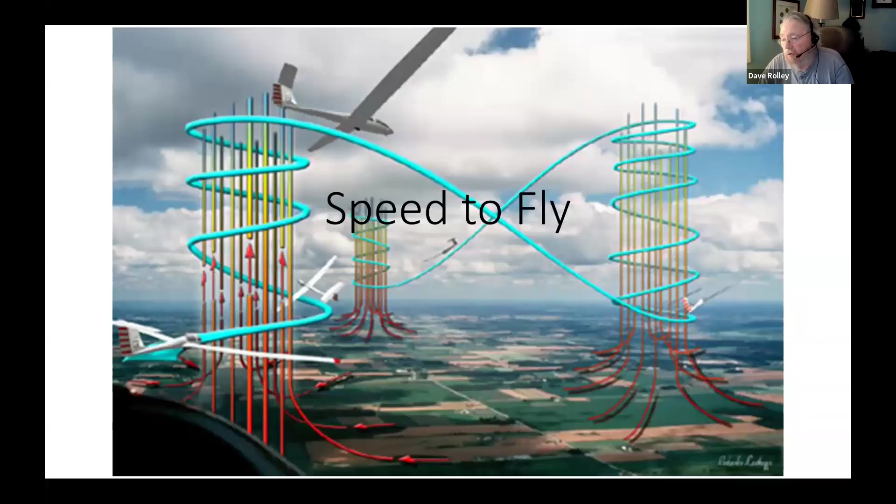In this year's first session, the Intro to Cross Country, we discussed a training approach that utilized the proving grounds that was developed by the members of the Cu Nim Gliding Club up in Calgary, Alberta. The Black Forest implementation has a simple four-leg task with the turn points at a 5 nautical mile radius out from the airport as the racetrack task in the proving grounds.

And it's roughly 50 kilometers around the task, plus the distance to and from the start and finish point, making for a total of about 70 kilometers. This is the first cross-country flying that most of our members are exposed to. And the gliders that we've used for this over the years: a K-21, a PW-5, a Russia, and our Blanik. All of these are roughly 30 to 1.

So, just for oversimplification, we considered the other three types, not the Blanik, as 32 to 1 gliders. And we set up the rules for the racetrack using the bronze badge guidance at 16 to 1 glide ratios, and we gave them hard decks. And the whole idea behind a lot of this was to take away some of the more difficult decision making from early cross country.

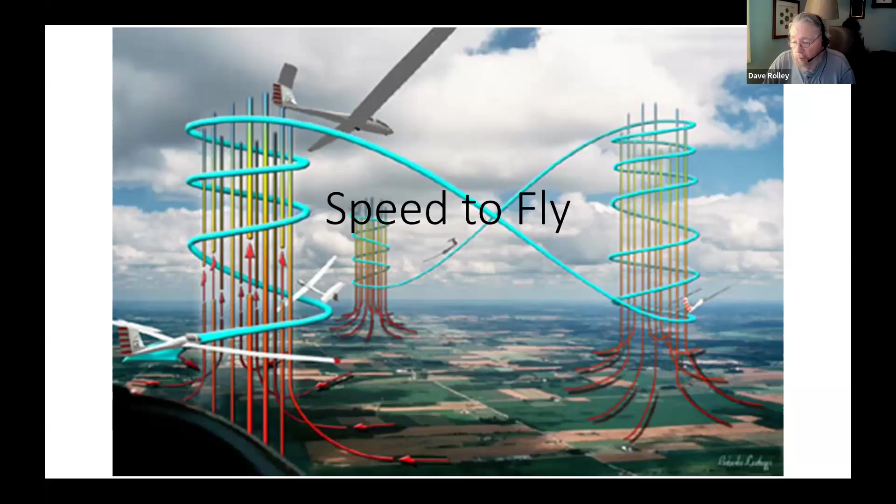So most of what we're going to discuss this evening, I learned in my first glider years and years ago, forgot a bunch, and then I relearn it and rediscover it every few years. So we're going to talk about a philosophical discussion on the speed to fly. We're hoping to gain an understanding of it and illustrate its use. This isn't about racing or record flying. We're still addressing the needs of an early cross-country pilot with the goal of helping these pilots move to an intermediate or higher level of cross-country flying.

This requires an understanding of the glider performance and how to apply that knowledge. This is in-flight decision making. The training wheels, like I mentioned, that we had under the proving ground system that we use for our very early cross-country stuff in our club, are loosened or possibly removed altogether. So this is where speed to fly, you get an understanding of that, and you're on the way to longer cross-country flights.

This is decision making, and interestingly about speed to fly, this is definitely decision making with uncertainty because you're going to have missing or erroneous data, maybe an incorrect transformation of the data, and you're going to have incomplete information. So the whole thing is there's uncertainty involved, but if you've got a strategy and a process, you can overcome a lot of the uncertainty.

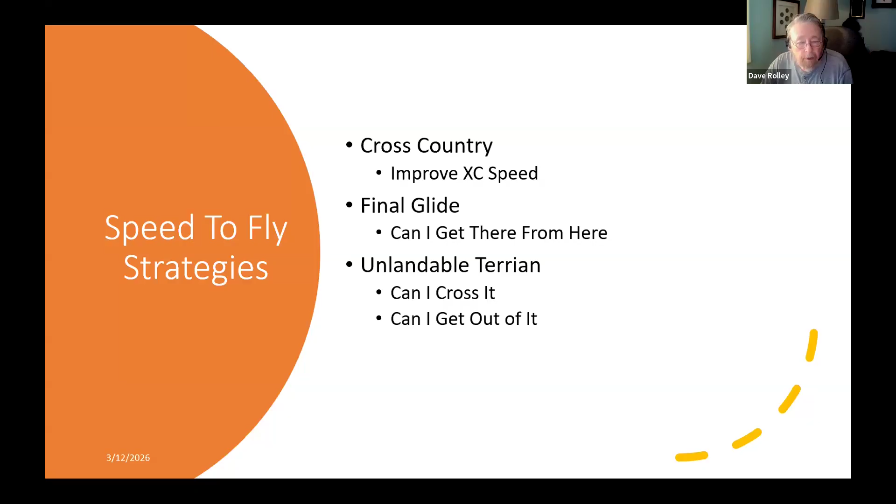I say stumbled, realizing if you're truly in dire straits or uncomfortable over unlandable terrain, how many mistakes have you made leading up to that point? So that's also something you have to think about in your growth in cross-country flying. But flying in an area where the consequences of having to land out are very, very serious, there's an adaptation to speed to fly strategy that can support the decision making under those circumstances.

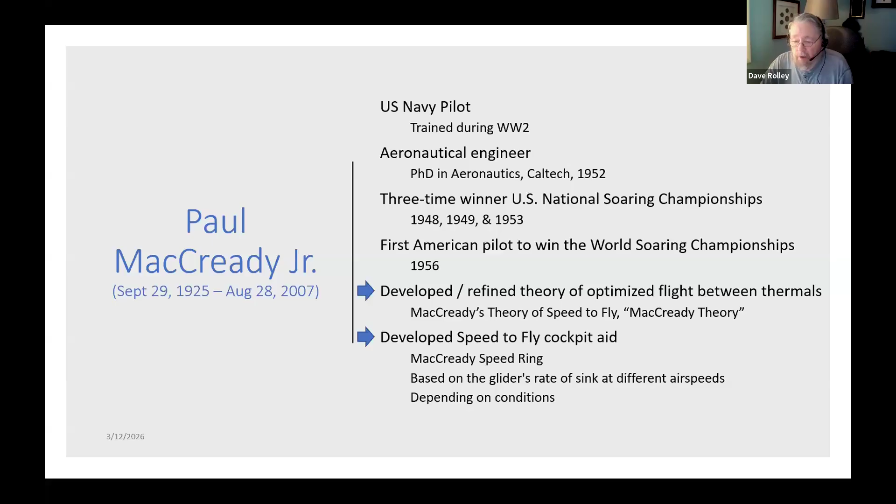And I'll show you that just so you can see, in case you ever stumble across one, you at least can recognize it. You can see where he contributed to soaring, and you can see some of his background. Now, there are an awful lot of other accomplishments in Paul MacCready's lifetime. I'm just highlighting the ones that are related to our topic this evening.

Traditionally, MacCready theory has been contest focused. And what you have to remember is that contests are an abstraction of real life. So in a contest, we're quantifying our performance and who has the best performance wins. For basic cross country, you know, did we make it home today? So you can see where there's an abstraction there.

The other one is a contest way back in the day was wafting off downwind at best glide speed or minimum sink speed, or flying a course at best glide speed. The other one is that it assumes roughly an equal distribution between climb and glide. And short-term goals are expressed as a number. We call it the MacCready number or just MacCready. And it's the expected lift in the next thermal.

How do you know? You don't. It's very much like lift bands that we've discussed previously. It's a guess based on what you see for the day and what you see along the course line. So it's also going to evolve during the day. You might start with a basic guess when you first get off in your first thermal, and then as the day progresses, you build up a more and more accurate model of how the day is going to behave in your mind.

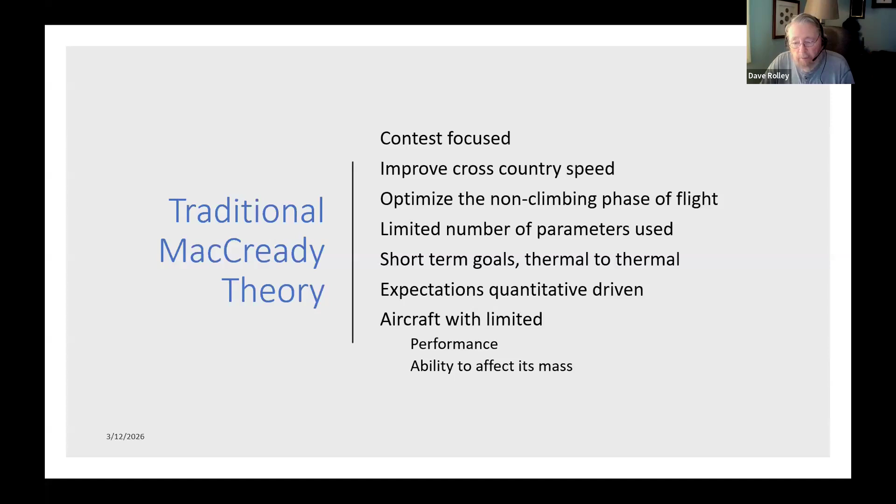So the goal here was to optimize the non-climbing phase of flight. Very limited number of parameters, basically just a couple of things that you could keep track of in your head. Short-term goals, and by that I mean thermal to thermal. And we're also talking about aircraft during this time period that had limited performance and very limited ability to affect the mass of the glider.

In modern speed to fly, contests are becoming less and less important to the overall soaring population. So this is casual cross-country flying, or it might be record flying, but that's not our topic this evening. Basically, your goal is to fly fast enough to achieve your day's goal. I want to do silver distance today. I want to do a 300K. I want to do a 500. I want to do a 750. I want to do an out and return, a triangle, that kind of thing.

And the bottom line behind all of this is that most of us would prefer not to land out, and if we did have to land out, we'd prefer to land in an improved location. One of the things is that we have equipment that supports a broader range of parameters, the cockpit computers and the flight instrumentation that we have, especially with the variometers that support speed to fly calculations.

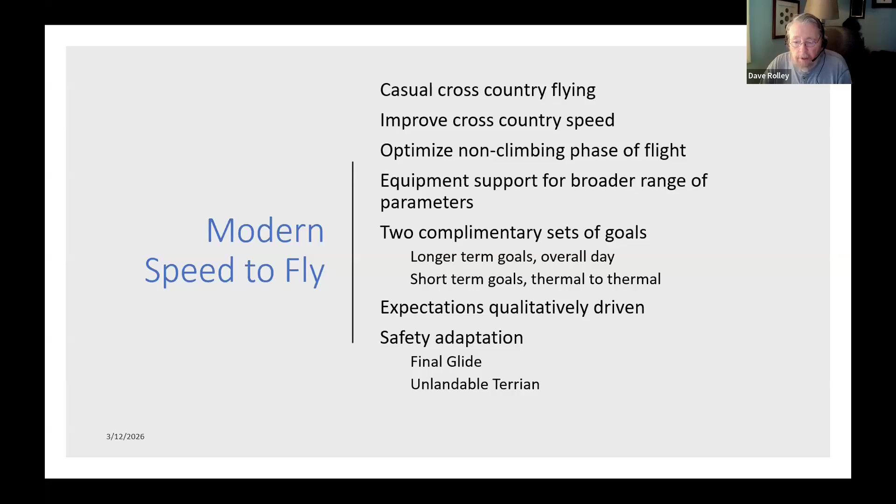But our expectations now are more qualitatively driven. Did I have a good time today? Did I make it around? Okay, you still may be chasing records or you may be chasing a personal best, but it's not the pure contest focus. And then the other thing, which John Cochrane's presentation got me onto, was the safety adaptation of speed to fly, especially for final glide, and then if you're in an area of unlandable terrain.

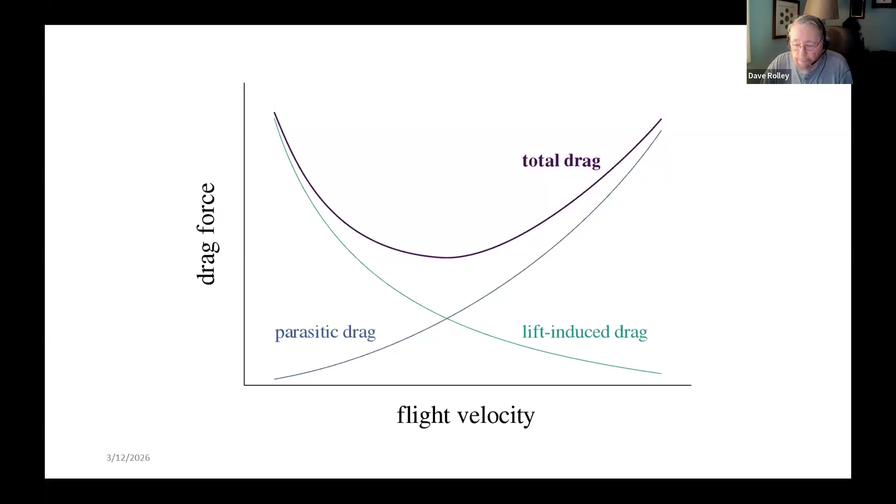So the inter-thermal speed to fly. So this is a total drag polar. This is the overall aircraft's polar. For pilots, the limit on the left side is the stall speed, and on the right side is VNE. Now that total drag curve starts to look kind of familiar. So the drag force on the vertical axis can be related to vertical velocity. If we do a translation on the vertical axis from force to vertical velocity, the graph moves from quadrant 1 to quadrant 4 in the Cartesian plane, and we get this.

Okay, so we're modeling the aircraft performance. We're working on good enough as opposed to absolute accuracy. This particular curve is often modeled from a quadratic equation. Don't let that turn you off. Don't worry about it. You know, Paul's spreadsheet handles however your flight computer wants the inputs and creates the tool that you can use. One of the things that this will point out this evening is that from a pilot standpoint, in most cases, anything to the right of the decimal point is probably unimportant.

We're going to be using graphs. I'm not going into the math behind any of this. Go play with Paul's spreadsheet if you want to get some of the mathematical insight. Like I said, he did an excellent job. I had one very similar that I developed, and then he popped his out for more general usage, and his is easier to use than mine, so that's why I point people in his direction.

We first, probably as a mass consumption, got the thing about using a quadratic equation from Reichmann's Cross-Country Soaring, which was the Bible on instruments and performance when I started flying gliders in the 80s. And it's still a very useful book. I have seen it published online in PDF form, but it's something that ought to be in your library, and you should peruse it. If you've got some serious questions, it gets kind of useful.

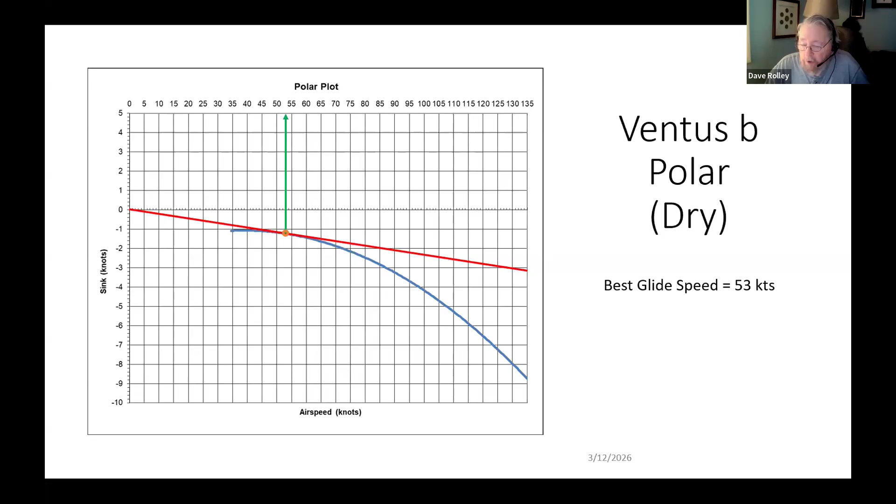And so from there, if we go vertical, in the case of my Ventus, that's 53 knots. That is the best glide speed for the Ventus. And if we go horizontally back to the scale on the left, we now have our sink rate. So if I divide the horizontal speed, 53 knots, by the sink rate at 1.23 knots, we get a glide ratio of 43 to 1. Okay.

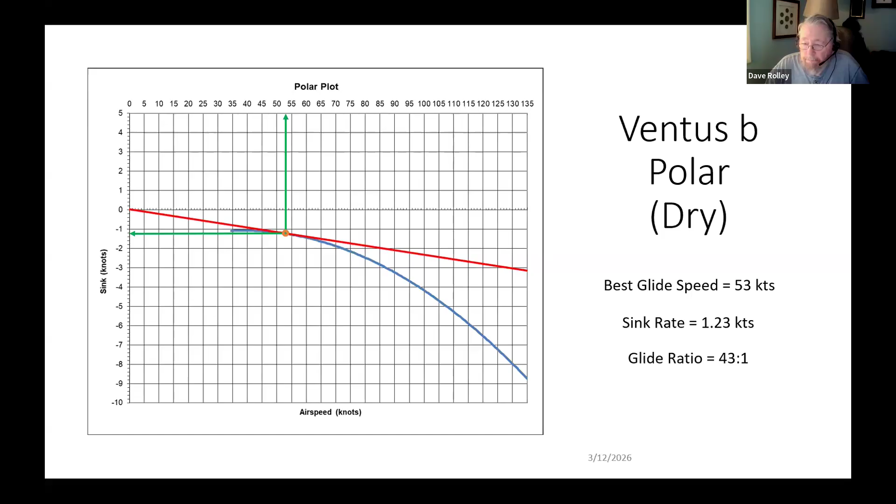Now, if one flies at the best glide speed, and this is the observation that MacCready made, what we're working on now becomes the basis of how we can improve our speed to fly, or our speed on course. So if we fly at the best glide speed, what's our achieved cross-country speed? So now we're going to look at this with no wind, flying on the course line, and let's say for the day we did our flight, we came back and said this was an average 2-knot day for the entire day that we were in the air.

So we come up here on the vertical axis and we get to the crossing point for 2 knots down to our speed to fly. And MacCready's observation right here was that our cross-country speed would likely be somewhere in the neighborhood of 32.5 knots. Forget the part on the right side of the decimal point. And if we take our 53 knots and our 32.5 knots, we find out that we're moving forward 61% of the time. So we spent 39% of our time climbing.

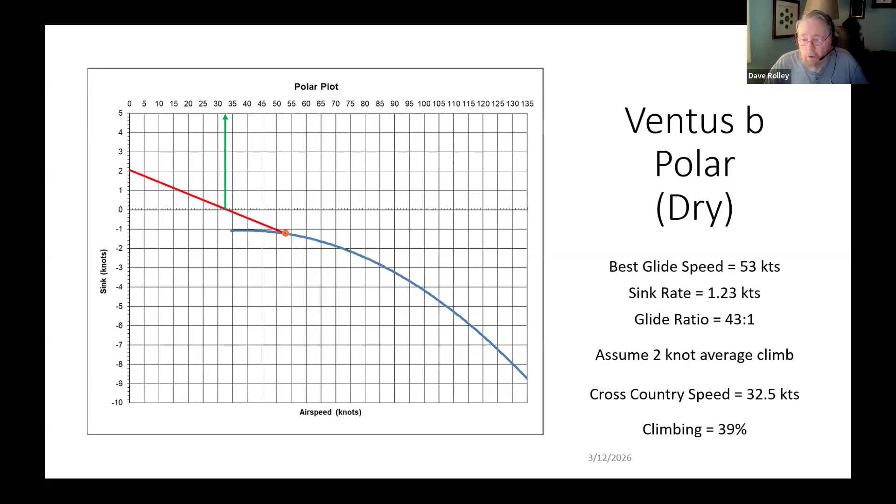But now, we're going to go out and fly at our best glide speed. How far can we fly at our best glide speed? So I've done it for 1 hour, 2 hours, up to 9 hours. If you look at 3 and 4 hours, a typical contest day is 3 to 4 hours. So basically, we would get somewhere between 98 and 130 nautical miles, or 181 to 240 kilometers, or 112 to 150 statute miles. I do everything in nautical miles because that's comfortable for me, and I can make decisions. I can do arithmetic in my head in nautical miles.

Okay, so the only reason I'm bringing this back to contests is because it does illustrate what we can do. Contest pilots routinely do 500 kilometers. So somewhere between 400 and 500 kilometers, in the neighborhood of 220 to 270 nautical miles. So down in this range. But they do that in 3 to 4 hours. So obviously they aren't flying the best glide speed on the glider.

The other thing that I want to remind you of is when we did the intro to cross country, I said your first 300-kilometer flight is going to be roughly 5 hours. Unless your club requires it to fly their gliders cross country, don't worry about your 5-hour flight. You'll get it when you get your first 300K. And notice that falls right in with flying best glide speed right there.

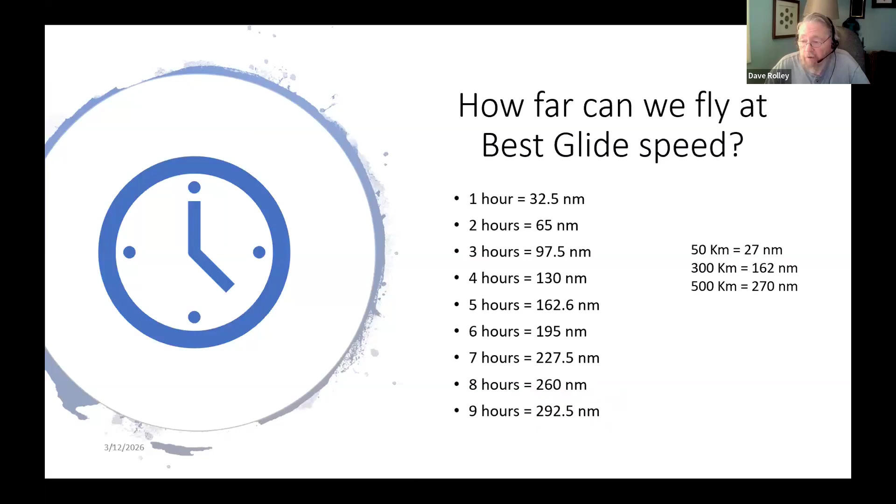So the goal of MacCready's theory was to improve cross-country speed in a contest setting. All of this points out that we fly faster. So MacCready's idea was to fly faster than the best glide speed. What he said is, if I fly faster than my best glide speed, I'm going to end up thermaling less, and my cross-country speed should improve. And so as we play with this, there's the best glide speed.

Now, if you go out searching for information on MacCready and see some of the original papers, remember for the time period that he developed this, the speed range between stall and VNE was much less in 1950 than what it is in a modern fiberglass carbon composite glider. And the mass of a modern glider can be varied over a much larger range than a typical 1950s glider. And those two things make a real difference in how we use this.

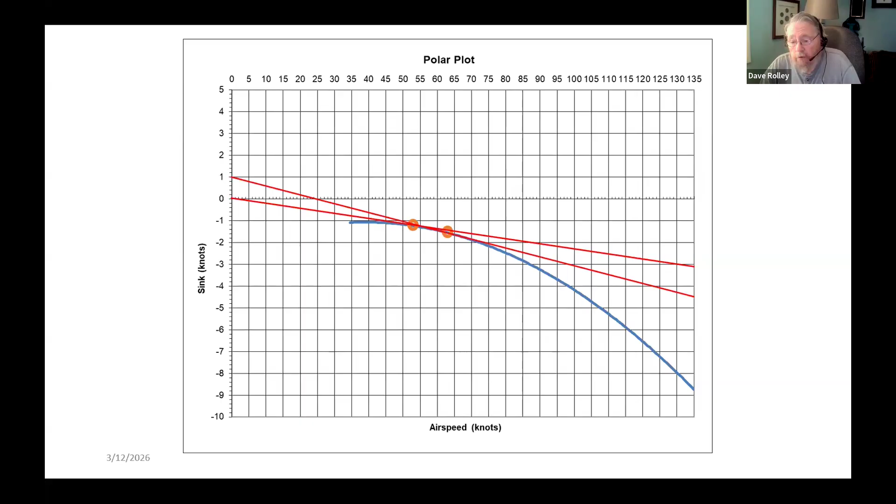So if we're looking at this, if we start playing with it and go, okay, so if I were to draw that tangency from a 1 knot point and carry it on out through, well, we'll go to the top of the scale over here to 5. So at 0 knots, it's 43 to 1, and we're flying at 53 knots. At 1 knot, we're now up to 63 knots and 39 to 1. And at 2 knots, we're up to 72.

And we're at 36 to 1. At 3, we're up to 80 knots and 32 to 1. And at 4, we're up to 87 knots and 29 to 1. And at 5, we're up to 94 knots and we're flying at 26 to 1. Okay. So these are the best glide speeds if the atmosphere supports that kind of lift. Okay.

So you want to shift, you know, we want to think of this in terms of expected lift. Okay. When you were taught this in your private lessons, you were probably taught that that's the speed, this is sink. Now, I want you to think about this in terms of expected lift in your next thermal. That starts to be the key. So those numbers become the MacCready numbers. So that's where 0 through whatever, that's where those numbers come from, is from doing this kind of an analysis.

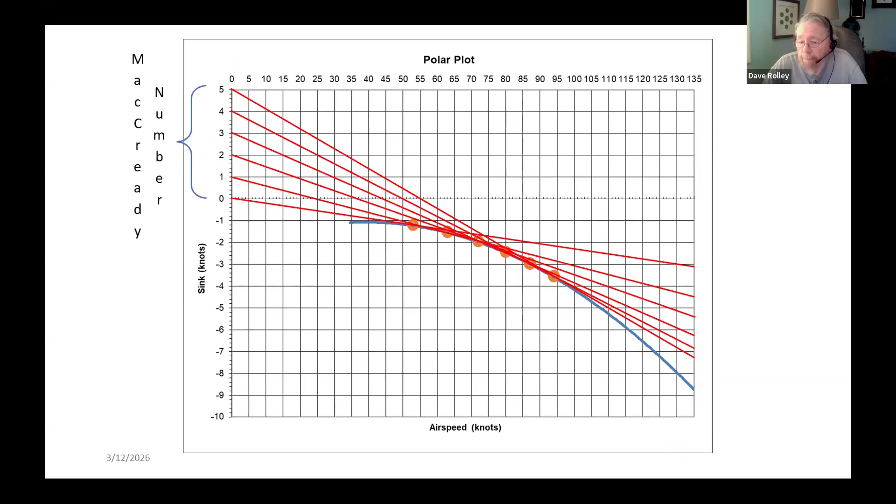So what I was just saying out loud, here's a slide that has it. This is where the modern usage also, because they were concerned, as you'll see in a few minutes, about the increase in cross-country speed, but we also want to track the glide ratios because those glide ratios become important when we start looking at the safety glide. So the final glide or the safety aspect of unlandable terrain.

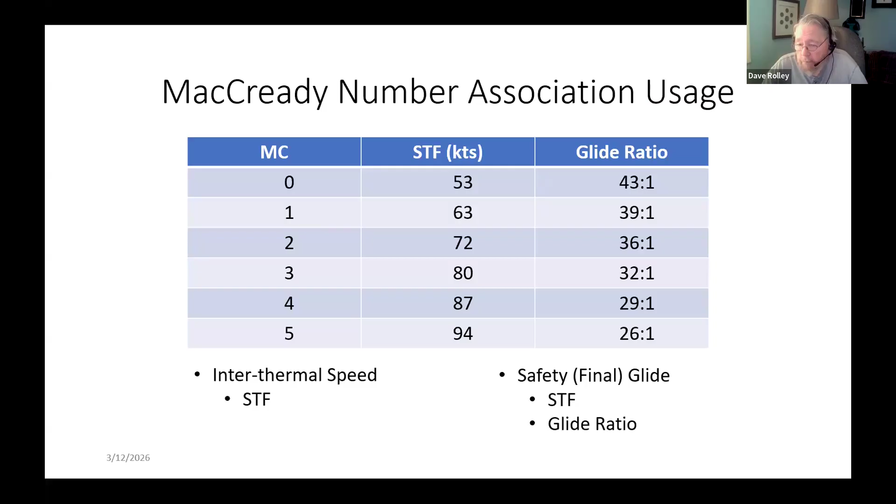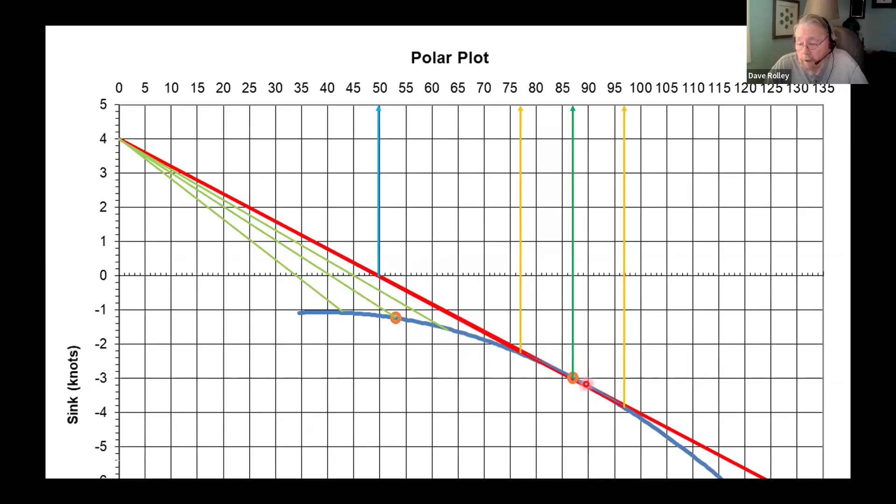I mean, mathematically it's interesting, but in terms of your performance in your glider, you've got to be back over here before it has an impact. And if you're back over here, you're not really worried about, you could be performing better over there.

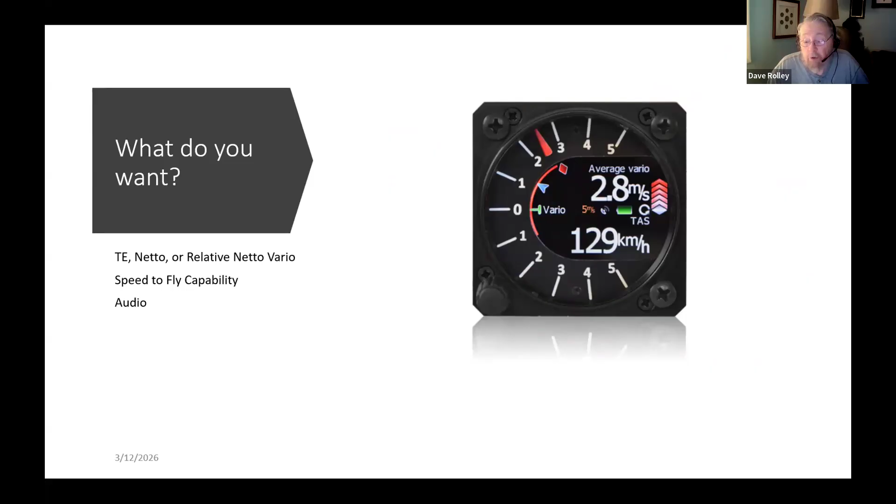So the speed to fly vario is dumb. It will recommend you past red line. You're the one pushing and pulling on the stick. Okay. So you've got to understand the limitations of what's represented here, in addition to the really nice presentation it has for the information.

The other thing that we need to look at is the changes in the glider's performance as the mass of the glider increases. So again, a Ventus B dry weight up here, 346 kilos or 763 pounds, or over here at 500 kilos and 1,100 pounds. All right. The speeds and the sink rates vary between the two configurations, and the speeds and sink rates are higher when you're heavy. However, it's kind of interesting, because when you start looking at it, the performance is not that dissimilar.

Okay, so I'm at 64 knots heavy for my best glide, and I'm at something that looks like about 1.5, as opposed to 53 knots and 1.2. Okay. And as we move up, like in a MacCready 2 situation, our airspeed over here is 72 with a sink rate of 2, and our airspeed over here is 84 with a sink rate just a little bit over 2. Now here's the interesting one. At MacCready 2, we've got a glide of 35 to 1, and strangely enough, over here at 2.2, we've got 38 to 1. We actually got a little better performance on our curve.

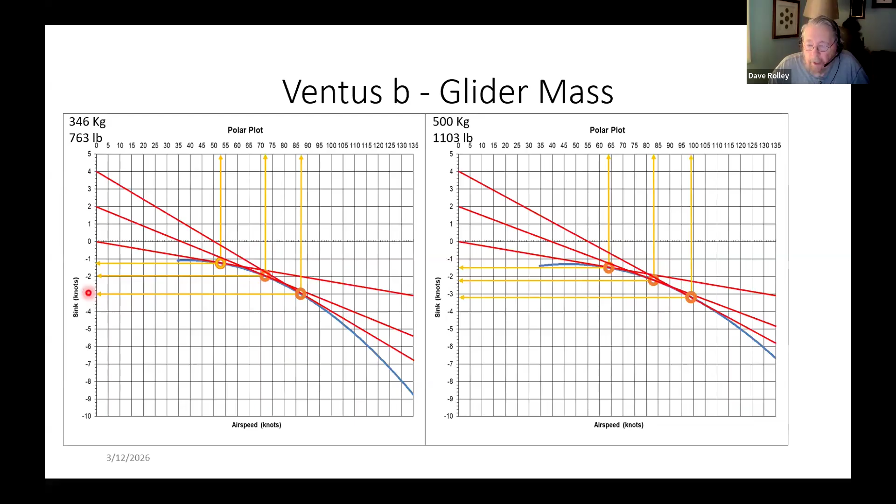If I push it to MacCready 3, you can see things get interesting. But again, we're at 3 knots sink rate over here, and 3.2, something like that, right there. And so I'll put these tables up. So as we go faster, despite the deterioration in our glide ratios, we're getting an overall improved performance. Okay. So that's why you ballast up. Of course, the day's got to be good enough to support you being ballasted up.

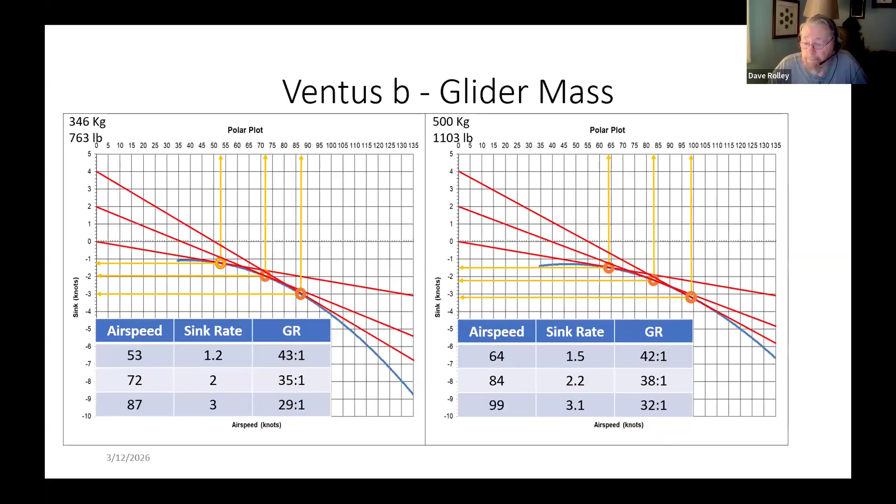Okay. And here's these two curves overlaid on each other. So the darker curve is the dry curve, and the lighter curve is the heavy curve. And you can see the difference in the best glide speeds right there. Okay, so one of the things that we have to know with MacCready is the mass of the glider. How heavy are we? And then there's taking it at MacCready 1, 2, and 3. I'll back up just a second. There you go. So best glide at MacCready 1 and then MacCready 2.

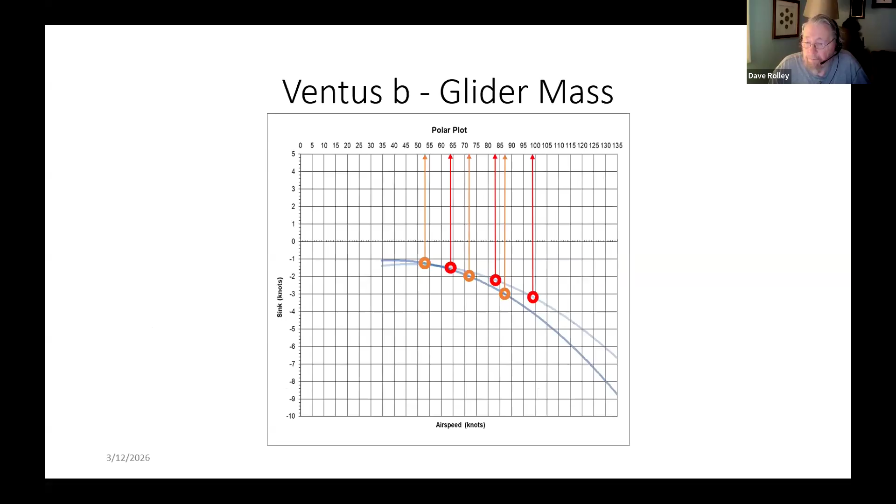All right. Now the MacCready question. What's the lift likely to be in the next thermal? Today we're looking a little further out. And that is, how do I characterize the day? We're no longer just trying to predict what's going to happen in the next, let's say, 20 nautical miles. What does the day look like? And then how do I characterize my current circumstances? What is the minimum if we were in totally smooth air and no search time? In other words, it's easy to center. Maybe you center punched it and managed to do your first turn and come right back into the core and go right up.

So what is the minimum lift you would stop and take right now? Now, if I'm at 17,000 feet and I'm running 85 knots and I'm under a cloud street, I'm not stopping. But if I'm 3,000 AGL or 2,000 AGL and it's been kind of weak and maybe it's early in the day or maybe it's late in the day, yeah, I may not be in survival mode, but I'm in "gee, I'd like to have something" mode.

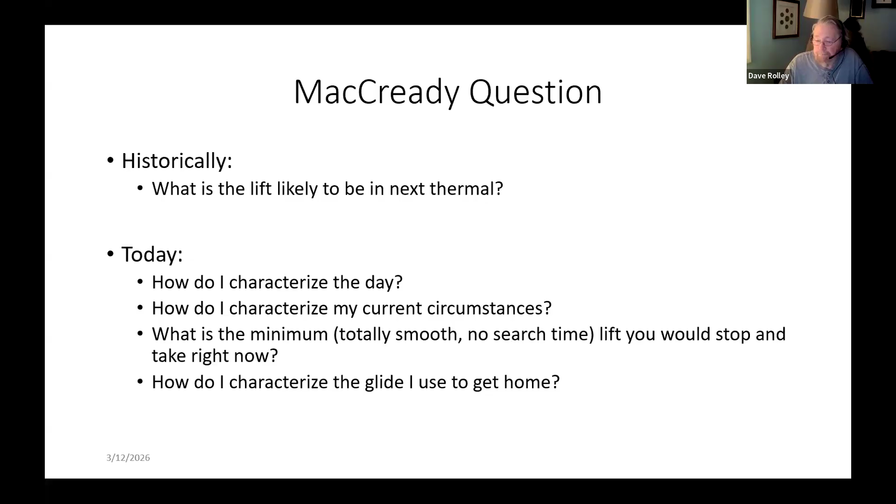In John's webinar, he says how to fly faster. He says climb better, avoid bad lift, leave bad lift. And he says thermal effectively. Don't waste time sitting around in a bad thermal. Okay. No fishing, no going back. So if you've made a turn and you're not finding it, it's better to go forward. And when you go forward, don't go back, because you just subtracted that time going back from your cross country speed.

You don't need to thermal at high altitude. If you're up in that upper lift band, run like you stole it. Fly in lift if you can find it, and you cruise faster than your best L over D. If you check the flights on OLC, the long, fast flights have thermaling as a percentage of the total flight time in the teens. Somewhere around 15 to 20% of the flight is in thermaling.

If you check your thermaling, download your flight and put it in SeeYou or put it in WeGlide or whatever. Check your thermaling percentage. If you're not a dyed-in-the-wool hardcore cross-country pilot, you're likely to find that you're thermaling somewhere in the 30 to 40% range for the flight. That's how much of your flight time was spent thermaling.

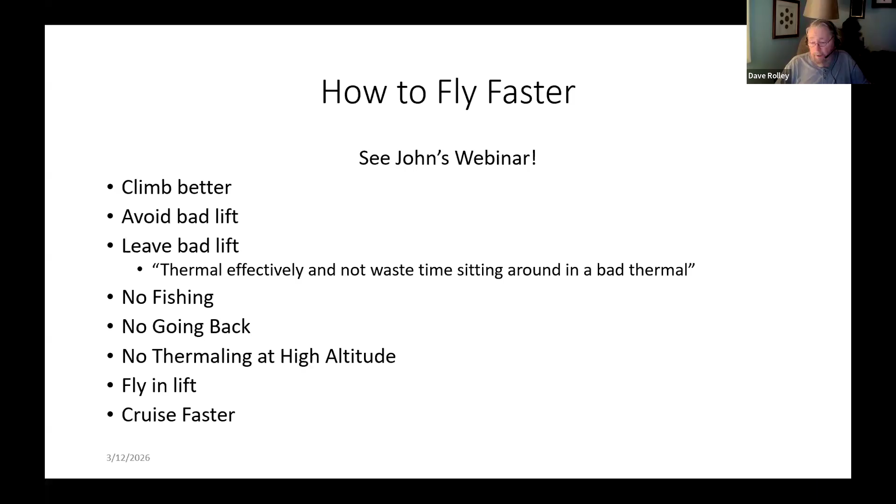You know, what you have to do is you have to build your confidence by building your skills and building your experience pool. The third one is cruise faster. Again, don't be flying at the best glide speed of the aircraft. And there's another thing that happens here, and I'm stepping outside MacCready just for a second, but it's also another thing that we need to recognize. Long, fast flights use more than thermals. So you want to be looking outside for energy lines, cloud streets.

Very often in our part of the country, it's not so much a cloud street as it is a boundary line with clouds on one side and clear on the other. That might even be considered a convergence, but there's some kind of boundary line. Years ago in my Ventus, I flew 75 nautical miles over the plains of Colorado without turning. That was my first long run without turning.

And basically, what I was doing is I was following a real wispy, and I fly with the orange tinted glasses. If I took the glasses off, I didn't see it. If I put them on, I did. A real wispy boundary line. And that was my first long run without thermaling. And I came home and you know, I was walking on air.

And then not last season, but the season before, I flew my ASH 26 from my home airport. It's Kelly Air Park, which is between Denver and Colorado Springs, east to Hoxie, Kansas. That's 197 nautical miles, and I used three thermals for the entire flight. The first thermal was my initial climb at Kelly. My second thermal, I was just north of Limon, Colorado, which is 45 nautical miles east from Kelly.

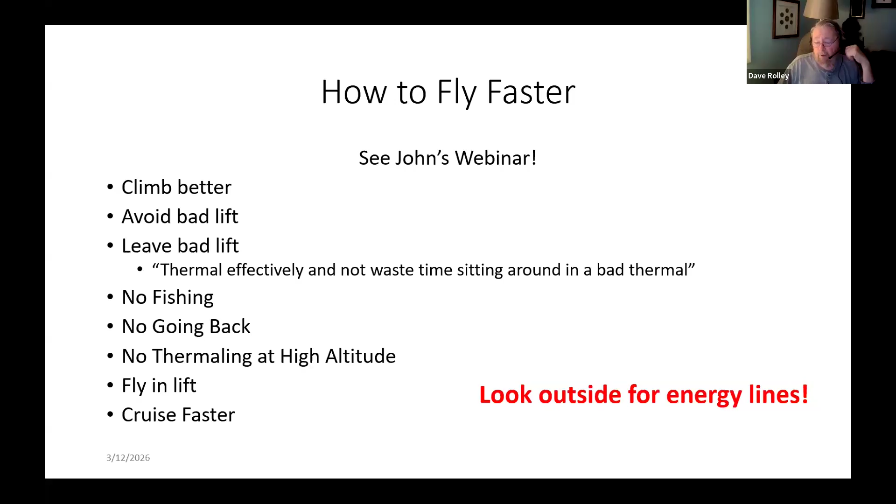All right, you're targeting cruise speeds in my Ventus B. There's a lot of information on this, but I've got MacCready numbers over here. I've got green. I've got airspeeds for dry and for wet. Okay. So basically, if I'm down using MacCready zero, in my mind, I'm at imminent risk of land out.

If I'm doing MacCready 1, I'm desperate. If I'm doing MacCready 2, I'm being cautious. Things are okay, but MacCready 3, that's my everyday setting. Everything I'm doing is fine. MacCready 4, I'm ripping, I'm confident. I may even be considered aggressive.

Now, when you look at the airspeeds, remember your airspeed limitations are in indicated airspeed. On the Ventus, the yellow arc begins at 108 knots. So I got it showing at 106. I'm not going to argue 2 knots right here. So I show these in yellow. In general, I don't fly in the yellow arc because it's always supposed to be very smooth air. And at least where I fly, very smooth air is relatively rare.

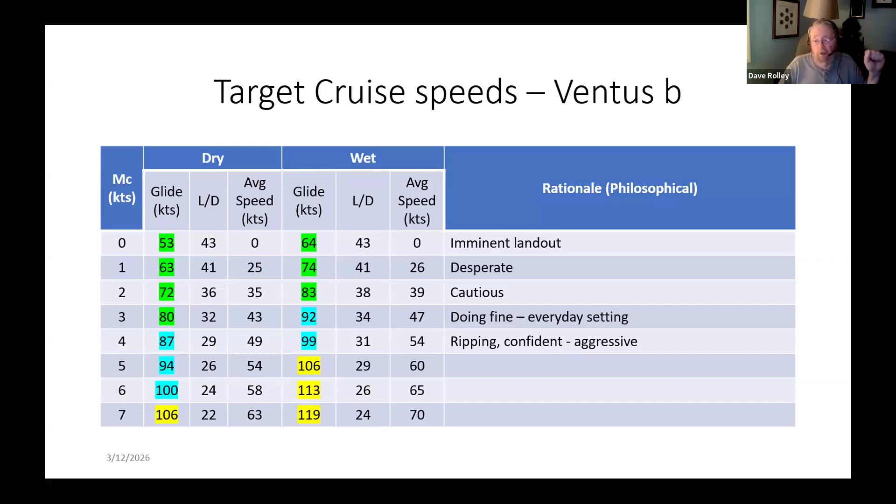You can make your decisions based on that. You can tell if you're going to sink. You can tell if you're in lift, whether you need to speed up or slow down. So always look outside. If you can truly see the answer looking outside, you don't need to be looking inside.

Now, this little approach showed up in John Cochrane's presentation, and he came up with this while flying a Discus. Okay, so I think he's flying a 31 now, but anyway, doesn't matter. Maybe he's flying a 29. I don't remember for sure.

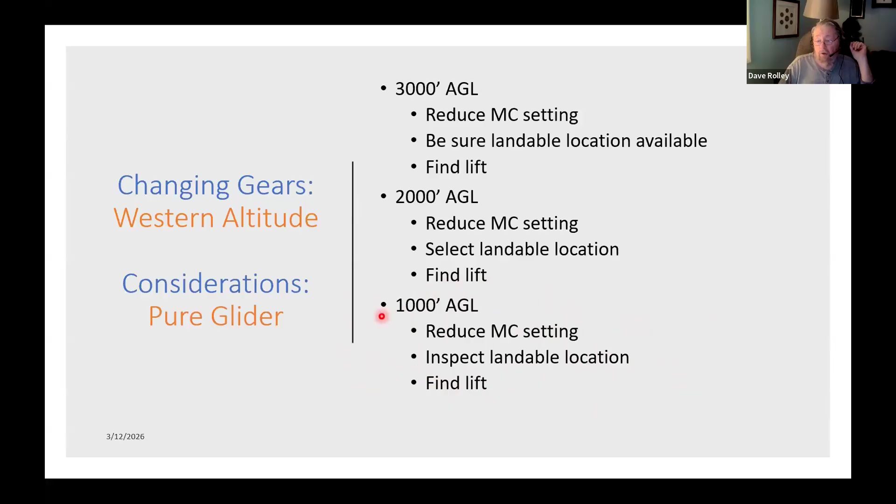And remember, aviate, navigate, communicate. Regardless of anything else, don't pick up the mic. Don't start checking instruments. You fly the aircraft. When you're down in this range, your job is to safely operate the aircraft. You know where you're going. There's no navigation, there's no looking at a map, there's no this, that, or the other. And at this point, if you've committed to making a landing, you've already called whoever's out there: hey, I'm landing out. But past a point, your job becomes purely aviate. Don't get distracted below that 1,000-foot level.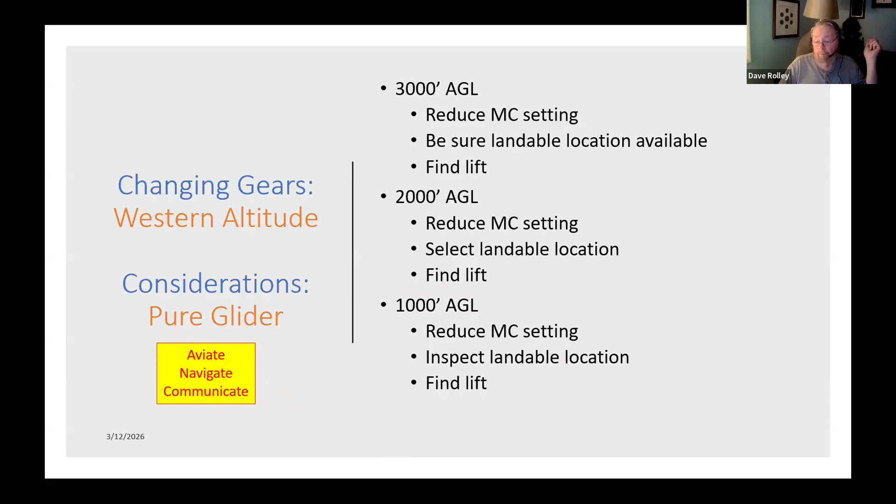Now, I also fly a motor glider. So how does this change when I'm in a motor glider? Okay. So I'm 3,000 AGL. I reduce my MacCready setting. I dial back my aggressiveness. I dial back my expectation on the thermals. I make sure that I've got a landable location available. I'd love to have multiple. The other decision that has now been added is I decide if using the engine is viable.

Okay, if the whole area is in strong sink or very strong winds, using the engine may not do anything useful. And if you've got a plummet to start engine, in other words, you have to put the engine out and then dive because you don't have an electric starter, you're going to lose 300, 500 feet. So if the conditions are not decent, do you really want to give up 500 feet to start the engine? Okay. So you decide whether or not the engine use is viable.

And the reason you make that decision here is because if you've said yes, I'm going to use the engine, or no, I'm not going to use the engine, then that affects what happens when you're down here at 2,000 AGL. Because now I've selected the field and I've got to be close enough to that field that when I throw the engine out, if it doesn't start, I can make the field and land. I'm configured and do my start sequence at 2,000 AGL. That way I have the option. If the engine doesn't start, I can leave it out and land.

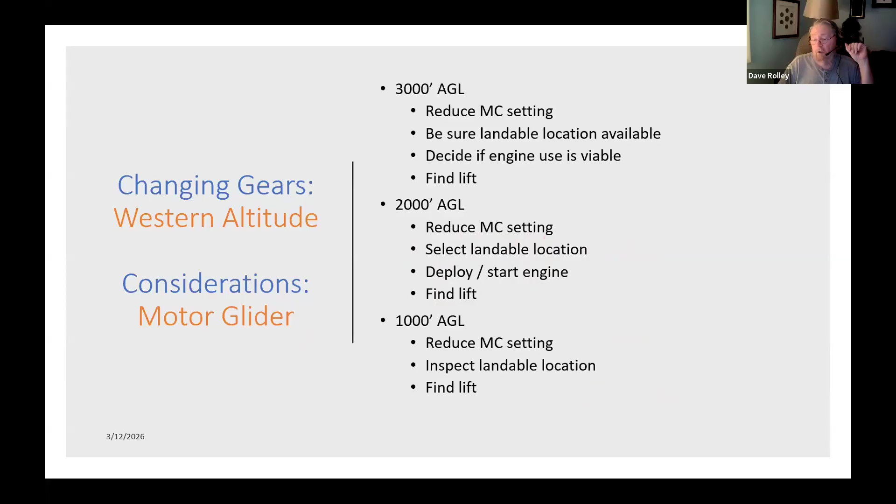So, on the ground it started, and with the load from the propeller pulling the pylon forward, he was able to launch and get home and have his mechanic take a look, because he saw that the deployed light didn't come on. So, especially with the self-launcher, go find a safe place, land, and then consider whether or not you want to launch and take off later.

MacCready settings, lower MacCready settings. Okay, why do we use MacCready 3-4 in 6 to 8 knot lift? All right. First off, we've got centering time. We've got thermals that vary with altitude. So like this one, it's 3 knots, then 4 knots, then 6 knots, then 7 knots, and then back to 4 knots. Interesting. The other one is that the thermals move. So what I'm showing here is that this thermal is moving slightly to the right as it goes up in elevation.

The other thing is when you look at this, yeah, you called your buddies on the radio. Wow, got a 7-knot thermal. This is not a 7-knot thermal. The thermal rating is either the lesser of the initial climb rate, so 3 knots down here, or the total gain from the bottom to the top. And most of your flight computers will give you a number that will tell you how much you gained in that thermal, and divide that by the time, and that tells you what your climb rate was, regardless of what you saw on your instrument.

Now, you'll always remember that 7-knot thermal, but analyze your trace after the flight to see how you did. And like I mentioned earlier, I use SeeYou on my PC at home. WeGlide, which is offered with the SSA membership, has a suite of analysis tools to help you understand your flight. So that's why you may be flying a 3 or a 4 when it feels like it ought to be a 6 or 8 knot day.

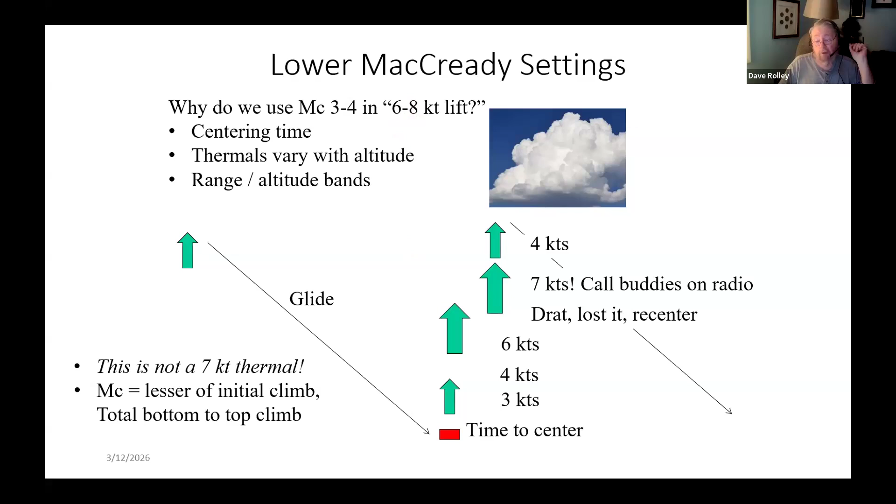But if you set it at 8, one, you're probably up in the yellow arc. And two, if you're bombing along that fast, you may never find the thermal. I'm not saying you can't. I'm just saying you might not. All right. That's the adaptation for modern flying as opposed to just using MacCready to get from one thermal to the next. The safety glide, our speed to fly for final glide and our speed to fly to get over untenable terrain.

A lot of folks believe that if they're on final glide, they fly MacCready zero, and that's what they should be flying. Of course, if you do the speed to fly for MacCready zero, you're at your best L over D, your best glide rate. And they think they're being conservative, and actually, this is a very poor choice. So a safety glide can be a final glide. A safety glide can also be any glide over terrain that landing out poses a real problem.

First thing that you have to do now is you have to truly understand what your instruments are telling you. You've got a speed to fly vario. Okay. That means that the vario understands the performance curve of your aircraft. That means that it has a speed director that says fly faster, fly slower based on the lift and sink that you're in. So it's going to give you an indication of fly faster, fly slower, or things are just right.

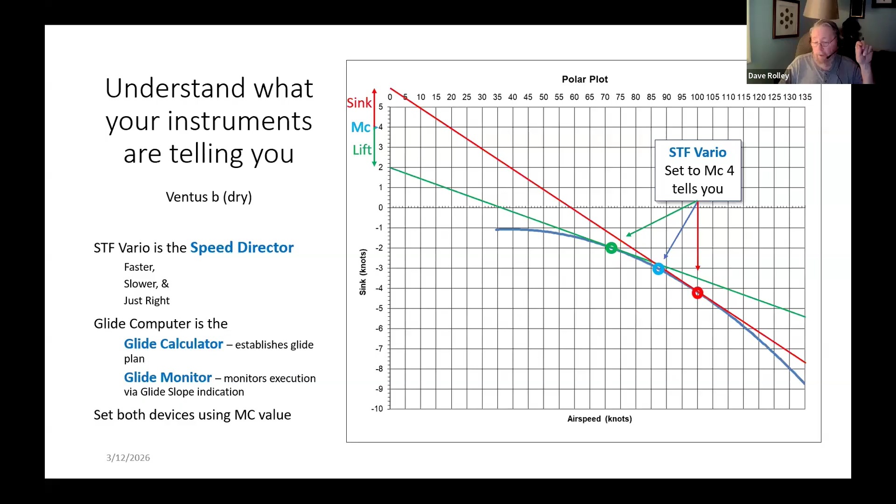And then as you're flying, almost all the computers have an indicator on them that tells you how you're doing with respect to the glide slope that you're on, and it adjusts for altitudes and winds. So if you're flying into a headwind, it's going to adjust it as you're coming down in altitude. So this glide monitor is telling you how well you're doing. The computer is not accounting for lift or sink. The vario is accounting for lift and sink.

Okay. Now, one place that you have to be careful. Some systems, for instance, the 302s, they allow the glide computer to set the MacCready value in the speed to fly vario. And I'm going to show you in a couple of pages why you don't want that. You want them operating on two different numbers, and I'll show you why in a few minutes.

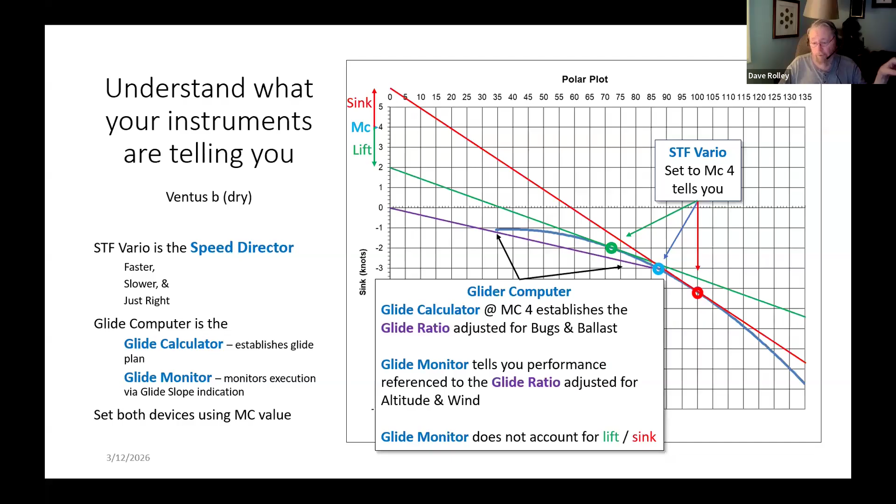The other one is that MacCready theory assumes that the lift and sink balance out over the course of the flight. Now, when we come to final glide or we come to the safety glide, this isn't the average over the whole day. This is the next, let's say, 30 minutes. You know, give you a final glide from 30 miles out. This is the next 15 to 20 to 30 minutes. So the lift and sink are not necessarily going to balance in that time period over that distance. So that's where it starts to fail.

The glide computer and the speed to fly Vario are set for different MacCready settings. So you're 30 miles out, you're coming in for your final glide. It's been a nice, strong day, and you dial in MacCready 4 on your computer, and the computer says you can make it home. You've got final glide. Congratulations. Okay. But I want to have some margin. Always put some margin in the bank. Whether your bank is altitude, whether your bank is speed, whatever, always have some margin in the bank.

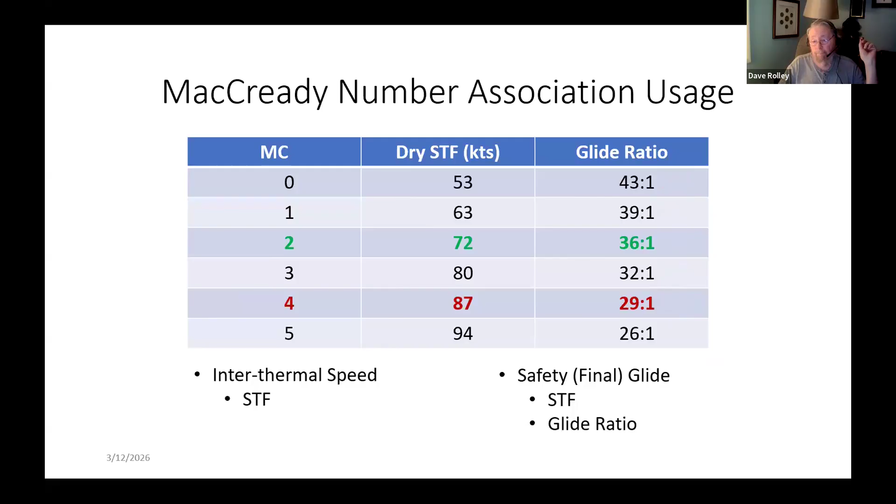Okay. If I'm 30 miles out and I say I'm going to fly MacCready 0 at 43 to 1, where's my buffer? I don't have one. If I run into more sink than anticipated, I can't change anything to help me get home other than to find lift. And I'm assuming right now that I might not find lift in this next 30 miles. So we're over uncomfortable terrain.

Your cockpit computer is generally looking to finish with minimum excess altitude because it's supporting contests and general cross country. Okay. That's not our issue in a safety glide, that's not our issue on a final glide, and that's not our issue over uncomfortable terrain. So you're going to use two different sources of information to manage your glide. You've got the speed director that's in your speed to fly Vario, and you're going to use the glide computer. Hopefully you guys are reading the slide as I'm talking.

So you're going to set the speed director, in my example, at MacCready 2, so you've got a 36 to 1 glide ratio, and you're going to set the glide computer to MacCready 4 at 29 to 1. The computer says you can make it. If your progress stays above the glide slope calculated by the computer, in other words, I keep a better glide than 29 to 1, you'll make it.

If you're descending towards the safety glide slope, the speed director, you might want to dial it down. We're getting closer. I'm not finding any lift. I'm not really sure I can divert. I'm kind of committed. Well, if I dialed it down to 1, then the speed director is working at 41 to 1, and you're still working at 29 to 1.

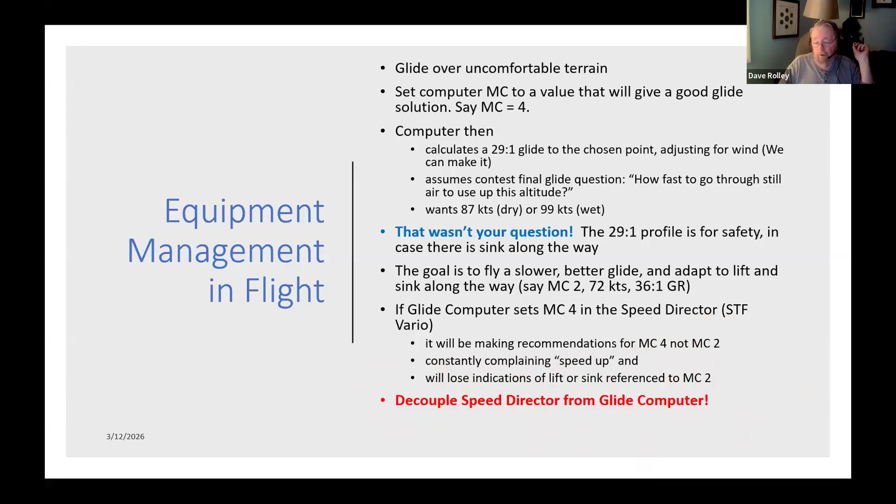If your progress is not as good as it was, and you need to slow down to improve the glide ratio that you're using, then dial this guy down. I don't think I'd ever go to zero. If it was getting that bad, I would already have been working. If I said that I had to reduce my speed to fly vario, for instance, in the example I'm using, I started at 2. If I said I need to reduce that from 2, I would have said, okay, I need to divert to one of my alternatives.

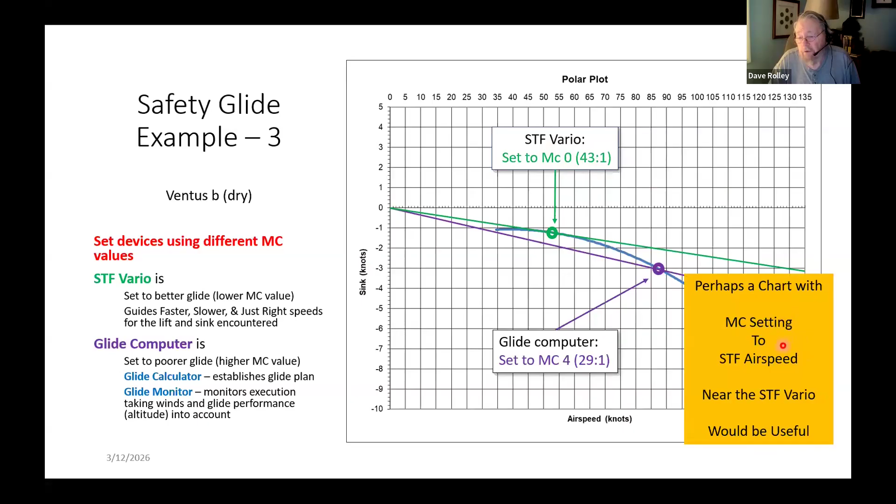Okay. Now, the key to remember is that every time this MacCready number changes, the airspeed that you're using as the basis changes. So you may need to have a little chart with MacCready setting to speed to fly somewhere to help you remember that the 87 that it's telling you it wants for MacCready 4 is not the number you want to fly.

Now, that's because a lot of varios don't have the speed to fly airspeed displayed. However, I do know that the LXNav S80 and S100 family of varios would allow you to configure so that you can have the speed to fly airspeed on the instrument. And that's what I do in my glider as a reminder of what airspeed I want to use when I'm doing this kind of a glide.

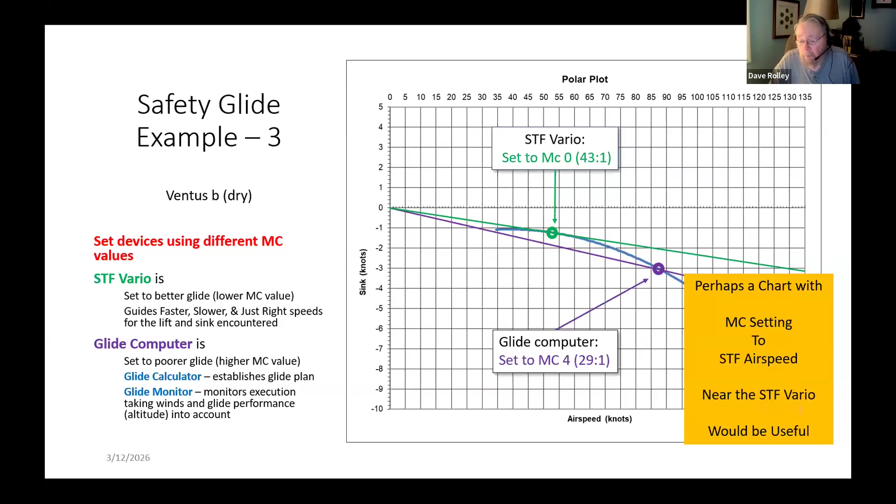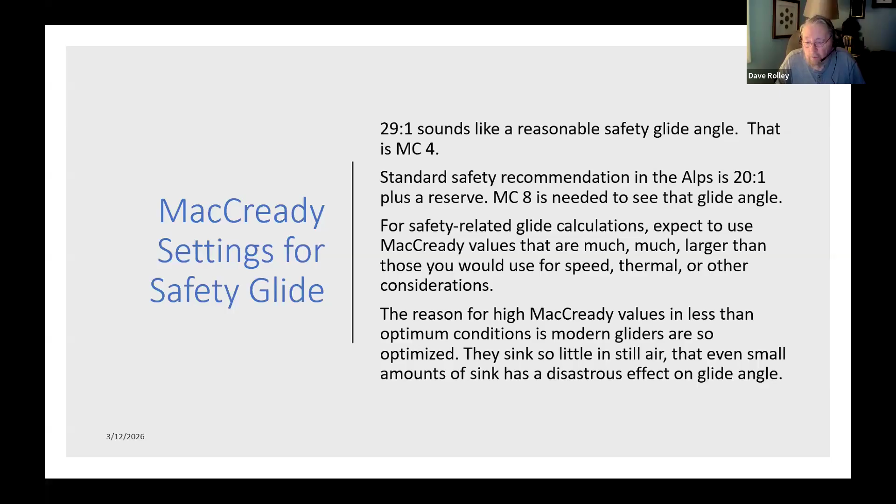So the other thing that you have to remember with this is you're using these high numbers because our modern gliders are so highly optimized. They sink so little in still air that even what we would say is small amounts of sink can have a disastrous result on the overall glide angle. So 20 to 1 is what I need to use for safety.

Okay. I don't care about average cross-country speed. I don't care at what speed it says I should be flying this. I want the 20 to 1, and then it gives me solutions to the various targets around me. My computer will give me solutions. Do I have something usable within that range? Okay. Your question here is not what speed should I fly? Your question here is can I get home from here? And you're using the MacCready mechanism to help you evaluate the answer to that question.

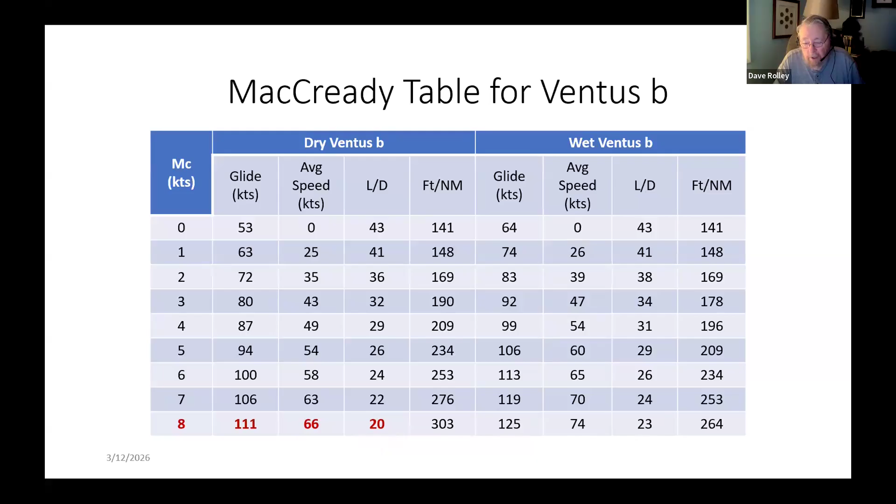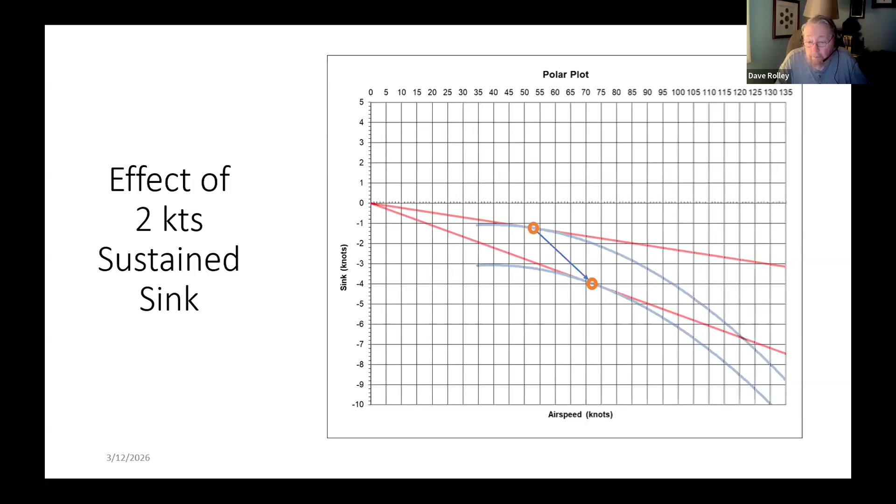So you can play the game. In this case, I'm going to shift the chart slightly. This is a netto, so this is the atmosphere around you. And so MacCready 0, this is your best angle. Assume the pilot's desperate and he's flying MacCready 0. How bad is his glide in sink? Okay, it's horrible.

Okay, in 1 knot sink, he's flying MacCready 0, so he should be a 43 to 1 glider, right? He's in 1 knot sink. His glide ratio is 25 to 1. In 2 knot sink, his glide ratio is 18 to 1. In 5 knot sink, his glide ratio is 11 to 1. That's worse than a Cessna 172 with a windmilling prop. Okay.

So the other thing that you have to take into effect is whether or not you think that this is a line of sink. There are lines of sink as well as lines of lift. So if you're on final glide and you get into a line of sink, yeah. Okay, so this illustrates why you don't want to use MacCready 0. You don't want to use MacCready 0 and peg it there, because if you're in sink, you're not 43 to 1.

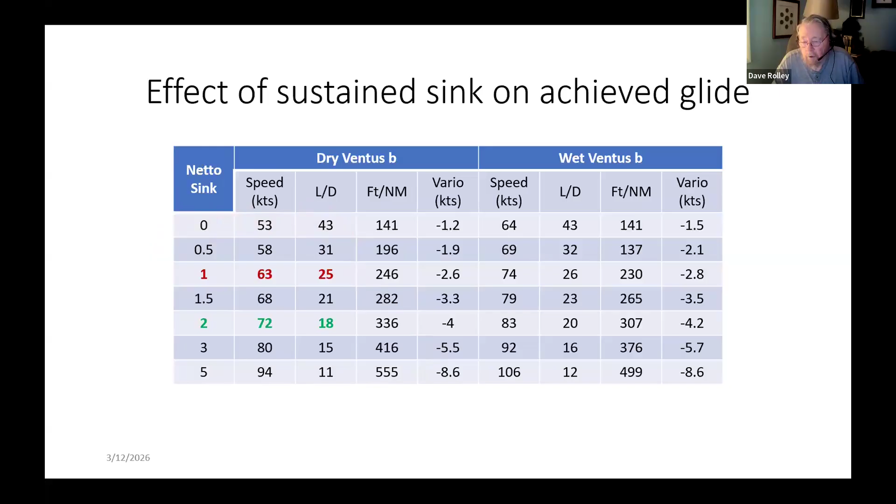Again, this is a pre-flight. This is an on-the-ground exercise. So if I fly MacCready 3 all the time coming home and I blow one or two final glides in a decade, that doesn't mean I need to jack my MacCready up to MacCready 5 to ensure that I get home. Okay.

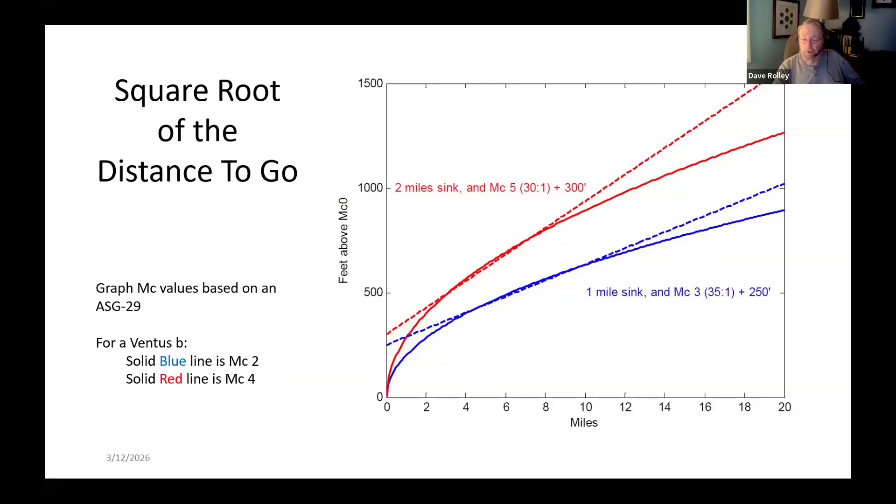So the real thing that happens here is that if you follow this, using the square root of the distance to add to the 200 feet back here, if that's what the MacCready zero number is at 1 mile or 2 miles, then in that case, once you get that rule of thumb established, that will almost always allow you to get back in with some margin. And the whole purpose behind this is to get home safely, right?

So, what values should you use in the real world? Okay, so we're talking about the computer setting. The vario is up to you. How you fly is up to you. And the standard answer, especially from an engineering background, is it depends. It depends on the cost of not making it to your desired landing point and consequently what probability of not making it you can accept.

Okay, so we're doing casual cross country. Maybe we're doing contest cross country. If you're doing casual cross country, you're flying over good fields, the cost of a land out versus making it to an airport is only inconvenience. All right. So in halfway decent conditions, set the computer to 4 and set the speed to fly vario to 3.

A weak 1 to 2 knot lift, build up some margin, set the computer to 3 or 4 rather than MacCready 2 of the last thermal. Set the speed to fly vario something lower. Okay. And especially if it's late evening where the lift has gotten weak, but the sink has gotten weak, build up a margin. Remember, you're not flying the MacCready for the computer. You're flying the MacCready on the speed to fly. You're flying the airspeed associated with the speed to fly vario.

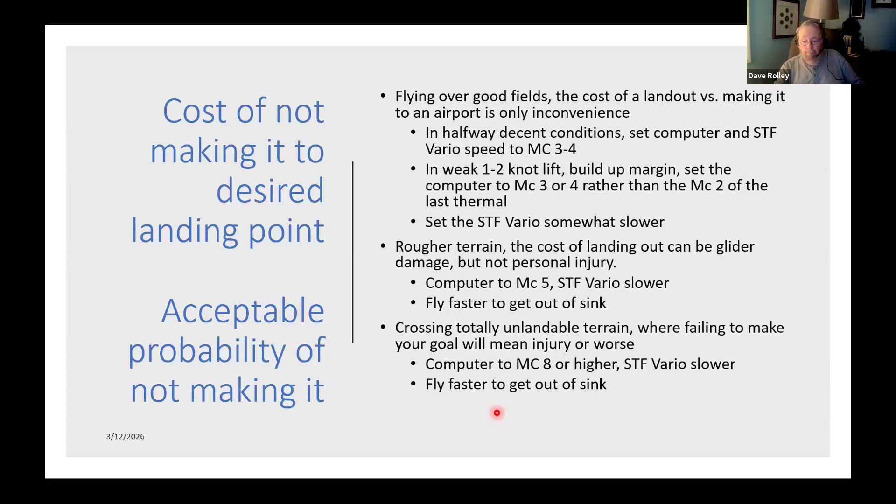You will routinely get to your goal with gobs of altitude, but we're doing this for fun. There's nothing there that says risk your life, especially if you're crossing unlandable terrain. So yes, that's the point. Get home with altitude in the bank. You know, that way your plane doesn't have to go to Fidel's shop in Moriarty, and you don't have to visit the emergency room. Give yourself margin.

So when you're looking for the version of MacCready that I'm talking to you about this evening, at any moment, what is the weakest lift I would take right now? Set that to your MacCready value. I use this scale that helps me guide the settings that I would use. So 0, imminent landout, desperate, 1, 2, cautious, 3, every day, 4, aggressive. When I get into 5 or 6, it pushes me into the yellow arc. I don't fly into yellow arc.

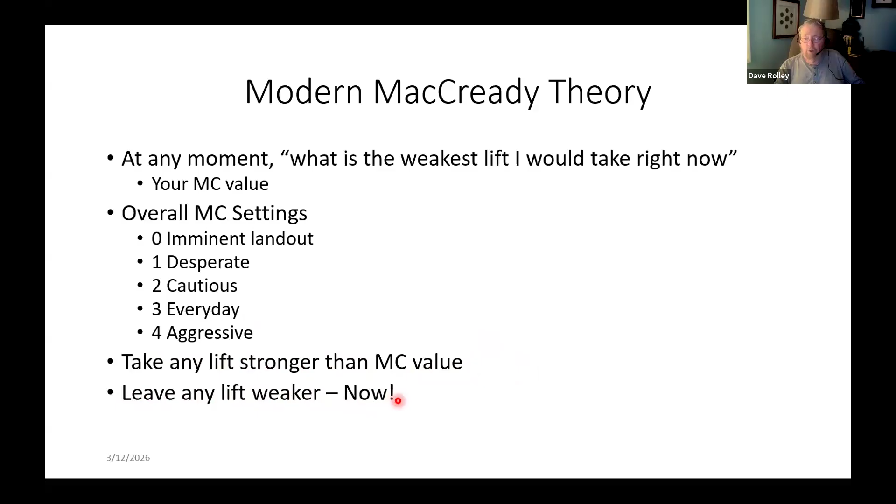Take any lift stronger than the value. Leave any lift that is weaker. Leave now. It's not worth it. You've got a corresponding block speed, so you never fly your best L over D. You fly the speed that's indicated, and then you have this range around it. You can set your block. A lot of people use a plus or minus 10 knots on that so that it's not constantly pinging you about speeding up and slowing down.

Your MacCready setting depends on the weather that you're flying in, the conditions you're flying in, and the terrain that's ahead of you. You reduce your MacCready expectations. I say value, but what I say earlier, reduce your expectations for the strength of the thermals you're going to find and reduce your personal aggressiveness as you get lower. Increase the MacCready setting as you get higher. You can expect better thermals.

I don't think you need to get more aggressive as you get higher, but you know, sometimes you get up there and it's going really great, and you really do have to dial yourself back when you come down, when you get lower. Leave bad lift when it's safe. That's one of the things that doesn't get talked about enough is that I'm down low and I got this 1 knot thermal or this 2 knot thermal.

And so that's not great lift, but if I leave right now, I'm landing out. So use that to get you up, get up a couple of thousand feet, and maybe you can search a little bit for something better. Stair step your way up, that kind of thing.

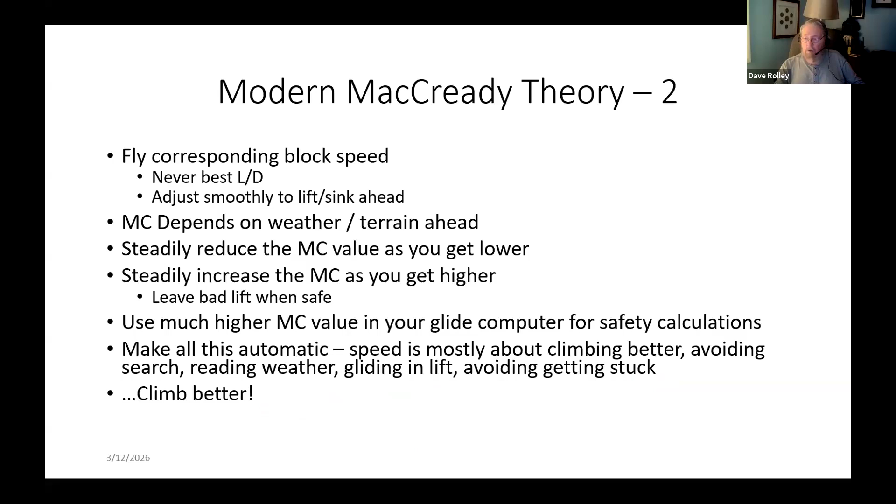All right, as we look at this, all models are wrong. Some are useful. Okay, so MacCready theory is built around a model of performance of the glider and how the day is and your abilities as a pilot. We're close enough on the modeling that it makes the MacCready theory useful for flying faster, efficiently, and effectively.

Okay. A 70 knot average cross country speed, so 115, 120 kilometers an hour. Efficient thermaling, gliding in lift, and it doesn't come from booming thermals and mad fast glides. Okay, it comes from using the day, not fighting the day. And I can't really emphasize this enough.

Don't put MacCready 1 or MacCready 0 into your glide computer when you're trying to get home for final glide. If you put MacCready 3 in and it says you can't get there, then what you should be doing is looking for an alternative, either another landing location or searching for lift. You're not ready for final glide. The real key is don't fly MacCready 0 or MacCready 1 on your final glide because you have no margin. You might make it home, but you have no margin.

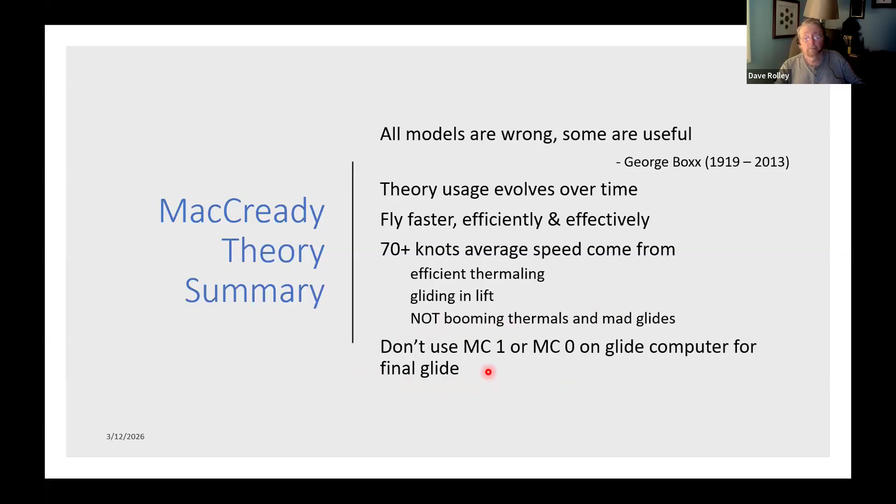All righty. Questions? Dave, we've only got one question here right now. It's from Richard, and I think you kind of answered this a couple of slides back, but he's asking how often do you adjust the MacCready settings in flight, and what conditions or changes in conditions should I be looking for to want to change the MacCready settings?

Okay, I'm the casual cross-country pilot, not the contest pilot. Even though I do fly in contests, I keep making the statement that I fly in a contest so somebody else doesn't have to finish last. All right, so I don't change it all that much. When I do change it, I do the setups when I think I'm ready for final glide home. The other one though is you have to watch the day.

A couple of years back, I was about 60, 70 miles out from the home airport, a little over 100 kilometers out, and I got to watch the day change around me. A front moved in from the east. I was way out on the plains in the northeast part of the state, and where I had been flying in the MacCready 3 to 4-ish range, when that front moved through, I had to back it down dramatically because the lift became very few and very far. It was weak, there were fewer points, and they were much further apart.